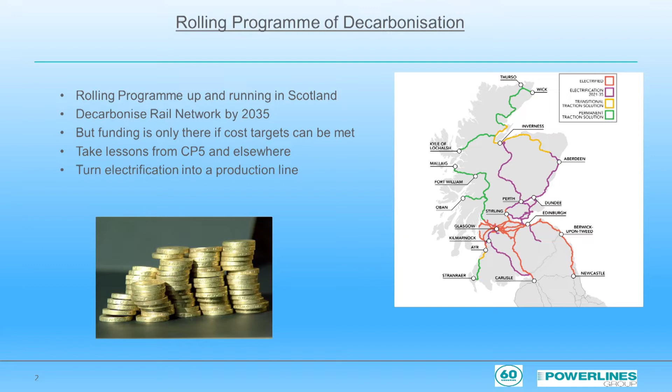From a delivery perspective though, we're not really where we could have been after 3 years of doing pretty much nothing on site up here. And all that training and knowledge of the previous 8 to 10 years has fallen away. But we are now very much underway in delivering the first schemes of this programme and trying to rebuild that skill base once again, and hopefully for the last time.

On Barrhead electrification, after a little bit of a false start last year, we're actually starting piling next weekend. On Haymarket to Dalmeny, we'll see the first piles going in the ground at the end of June, beginning of July. On the Fife corner, in the northern part of Fife, we've just submitted yesterday the Form A. And in Borders, which is actually probably the most advanced from a design perspective, we pretty much have an AFC design sitting on the shelf ready to go.

And then we've got the poor cousin, the traction power guys, where we're trying to upgrade the existing network and make it ready for the new electrified routes. The first new feeder station at Ferguslie, west of Glasgow, is due for commissioning in the coming months. Now, I know nothing of these giant fuse boxes, so if anybody wants to find out anything about them, Stephen Lynch or Brian Sweeney are standing over there. And it's also great to see lessons being learned from previous projects.

We're actually underway with CP7 design works to Aberdeen and Inverness, which would hopefully mean that once these CP6 schemes are finished, we're hitting the ground running.

But we're all too aware that funding for this rolling programme is only available if we meet the not inconsiderable cost challenge to get the STK rate down to where Transport Scotland need it to be. And from what I can tell, there isn't really much of a choice — we have to get it down to that rate, or we'll find something else to do. We've already made significant gains in getting that STK rate down, which is evidenced by the fact that we're actually starting construction works.

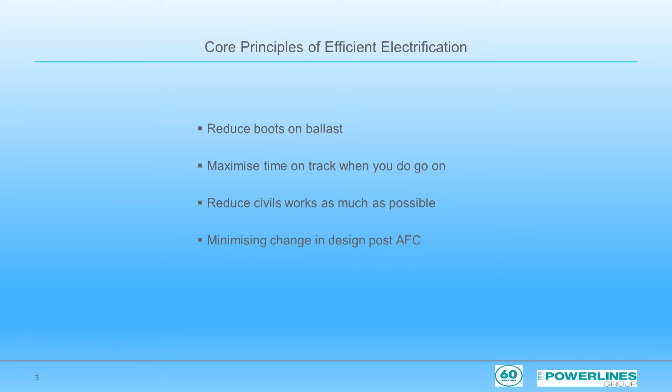And minimise abortive works and design change post-AFC. We won't eliminate it, but we need to be in a position where we are sure that the design will work when we turn up on track with all the materials and manpower.

There are loads of little initiatives we've been looking at, but there are a few key technologies and methodologies that we'll run through today that are really making a difference to us to help meet these 4 principles and drive down cost.

The first, and it's already been mentioned so far today, is the digital twin. I'm sure a few of you have heard it and used it. The driving force behind this in Scotland is Colin McAteer of Network Rail, and it's been successfully deployed in Borders and in the northern part of Fife, alongside the design partners Mott MacDonald, who have really embraced this.

Essentially, we've got a 3D mesh taken from drone footage that can have any design model referenced into it. And the big key for me is we can access it online. We do not need any fancy CAD skills to work it, which is good for us delivery guys. As you can see, it's almost video-like quality, a bit like a cab ride on steroids, and gives both construction and design a clear picture of what the finished design will look like and identify the constraints around it.

And bonus points for anybody that can identify that stadium. It's a bit niche to the Scottish market, to be honest. No. Raith Rovers, Starks Park.

So what are the benefits? Well, from a construction point of view, constructability reviews can be undertaken from the safety and comfort of your own home. Miles of track can be covered in hours rather than days and days spent out on track, or nights and nights. We've also used it for design reviews, IDCs, IDRs, hazards, signal sighting, even listed building consents, and identifying environmental and social constraints. It's actually harder to find something that it's not useful for.

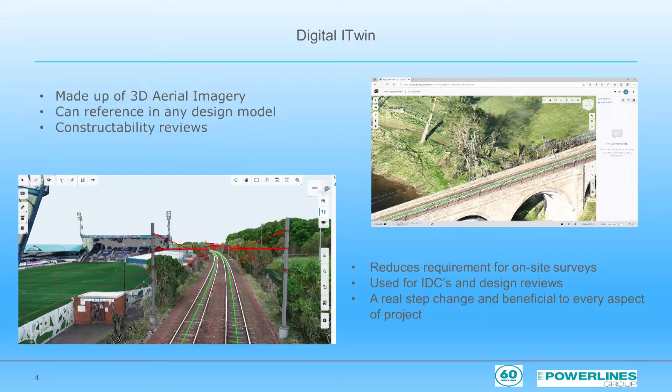Another technology we're looking at deploying is GPR, which we're using to reduce the volume of trial holes prior to piling and to reduce the overall length of the piles. Trial holes, for those that don't actually know, is essentially a 1-metre deep hole that we dig by hand to search for services. Then we fill it back in and then stick a foundation in it. It's time-consuming, expensive, and actually adds additional length to the pile by increasing the non-effective depth. And from a health and safety perspective, it's also a little archaic.

Sending humans down a hole to find cables is like sending canaries down the coal mine.

Network Rail Scotland looked at GPR as a way to reduce that pile length and carried out trials with GeoInfo, a specialist surveyor, over a number of sites to understand the accuracy and the outputs, and those were very positive. After initial reluctance on my part specifically, we've been very much bought into this and have started a much larger scale trial on Barrhead and Haymarket to Dalmeny, where over 450 locations have been surveyed to date.

We're currently carrying out a 20% check on those to build up our confidence in the technology, but the aim is to reduce that 20% down as confidence grows.

Alongside the reduction of pile length, in some cases that can be up to 25%, which in Scotland means we're actually less likely to hit rock.

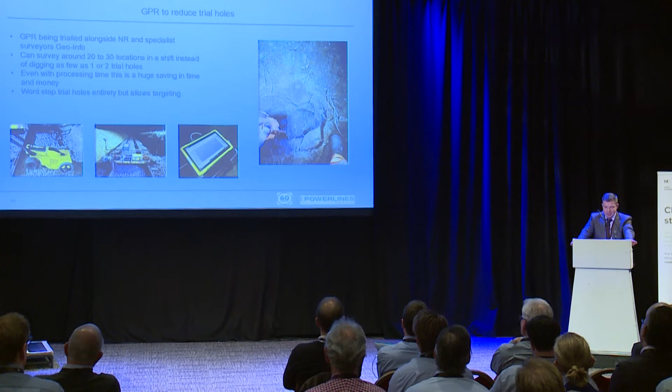The biggest benefit is that 20 to 30 locations can be surveyed in a single night, rather than 1 or 2 trial holes being dug. And even when you factor in the processing time, which is about a week, this is a massive reduction in programme and time spent on track.

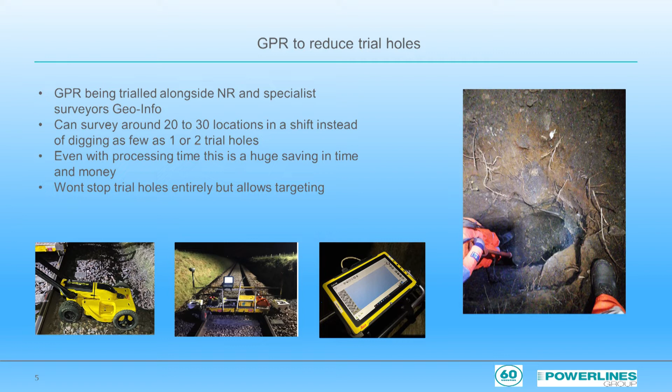This won't stop trial holes entirely, but it allows areas to be targeted, like stations and junctions where we've got complex areas, and areas where we do find services but can't move the foundation out of the way.

But there are some slightly wider benefits to using this, due to the output from the GPR being in CAD, and essentially becoming an accurate, up-to-date, buried services model.

And if the survey is done in a timely manner, then this becomes an input to the design, rather than services becoming something we react to post-AFC.

On Haymarket to Dalmeny, we've actually managed to supply this to Atkins, our designer, prior to the IDC for the Form B, which has allowed the design to be updated and gives us the surety of foundation installation, or certainly more sure, which will reduce on-site change.

But the real goal, though, for me, is to do this survey as part of the Form A. And this is really possible due to the accuracy of things like the automated design tools and iTwin, which allows us to go on site with confidence at that stage.

Moving away from the technology part, we're working hard to reduce the civil requirements in projects. A wise man who's now moved to Saudi Arabia once told me that the more you involve civil engineers in overhead line projects, the more expensive it gets.

The recent EPTANs and voltage control clearances and parapet heights have already brought significant savings, but we are now more looking at the overhead line foundations, both what they are and where they are.

Piling is still the go-to for efficient installation, and with the reduced pile depths we are now getting through a reduction in non-effective depths and the use of actual loads instead of 75% yield strengths, this will only improve.

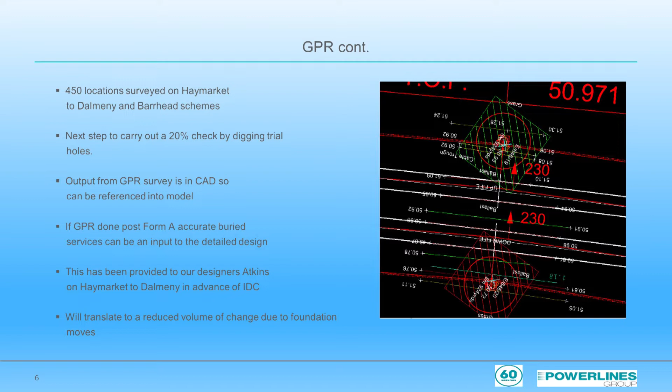Rock is probably the biggest cause of bespoke foundations in Scotland, and it's a thing we've got a rather lot of. I've used many solutions over the years to deal with rock, but it's always felt that we never quite got it right, mainly because we were never quite sure where it actually was.

So we decided to try out all the various methods we've used in the past and see what was actually best. Our lead civil engineer, Mark Craig, arranged a few days at Cloburn Quarry, along with our piling contractor, Story, and our borders designer, Motts.

Cloburn, for all you PWI types, is where you get most of your ballast from in Scotland, and is a red granite quarry, which would provide a significant test for the trials.

So they tried out techniques like down-the-hole hammer, micro-piling, coring and augering to understand output, limitations, set-up times, even measuring noise, all done off-track in a contained and safe environment.

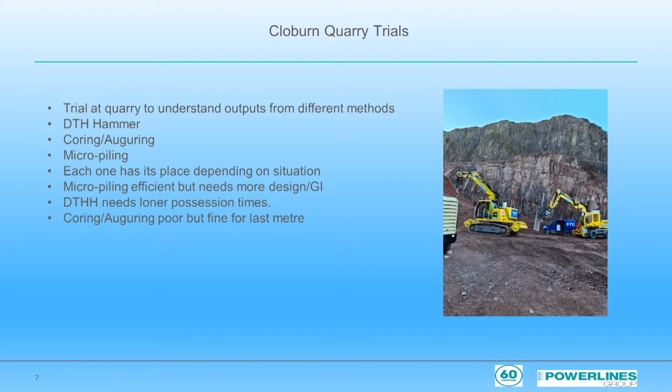And the outputs were, with the exception of the coring, which was hopeless, they all have a place in our armoury, but it depends on the situation you're faced with and the access that you have.

Micropiles were superb, went through the rock in no time at all, but they do require a bit more design time to pull it together. And there's still the issue of transferring from the micropiles to the mast, which we are actively working on. The down-the-hole hammer was brilliant as well, but it's incredibly noisy and takes a long time for setup costs. But it still has its place.

It causes disruptive possessions and disruptive access, but once you're on track and you've got yourself going, it's a very good output, and you end up with a pile at the top. Augering still has its place too, where if we identify rock that's only the last metre or so, you might as well spend the time doing that rather than bringing in an expensive down-the-hole hammer.

But the key to knowing what to use and when is knowing where the rock actually is. We spend millions on GI to inform design, but for me, the most essential part is knowing the actual depth of rock at each location. Spending the time and money doing that is worth it, as it gives us surety of the foundation installation.

We've just completed a few nights at the weekend of probing in Barrhead, and we decided to use a 6-inch mast and a Movax, which we drove down to find the rock level. Now we know exactly where, over 50 locations where we knew there was shallow rock, that rock level is. This was done over 2 or 3 nights, so it's very inexpensive - certainly worth it. We can now plan the installation of each of those foundations with a degree of confidence.

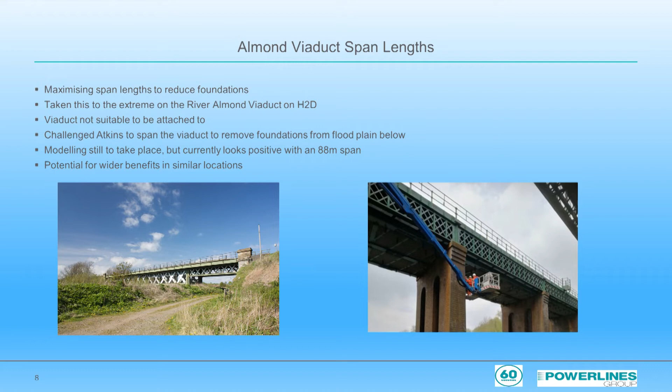But should the modelling prove favourable, there's potential not only to reduce the expensive viaduct attachments we install, but also to really push the boundaries of the 65-67 metre span length limit in UKMS to a much higher value, significantly reducing the overall foundations we need to install. And if we're able to do that using existing equipment within the range, then it's good for everybody.

I suppose I should really talk about overhead line construction as well. Our entire construction strategy is around minimising the works done on track by doing as much off-track work as possible. Off-track works are safer, cheaper, and much more efficient.

This essentially means we're going to attach everything onto the masts in the yard prior to taking it out on site - SPS, number plates, DP stocks, earthwire connections, bonds, everything we can possibly get on the mast will be going on before we take it out on track. We're also going to pre-rig the cantilevers in the yard and take them to site, attach them to the mast on the ground, and lift it in one go. This approach will reduce the normal 3 or 4 visits to each mast, hopefully down to a single visit.

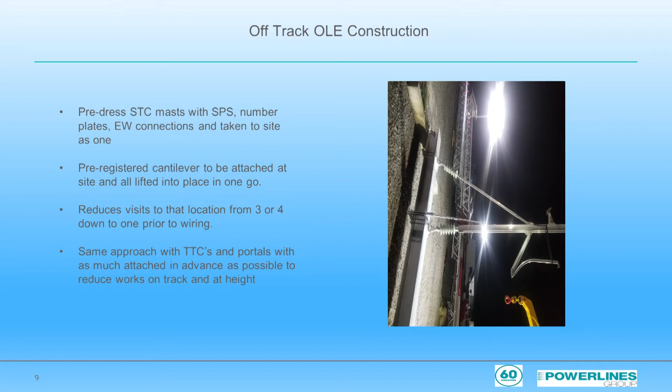It also removes the working at height requirement by taking MUPs out of the equation altogether, as this can be done with an RRV and a couple of trailers. This approach will be hugely beneficial in Scotland, where STCs make up the majority of structures, but we're also looking to apply this principle with portals and TTCs. We've even started seeing if we can attach switches onto the top of portals and masts as well and take them to site. But it's all about logistics and prep.

But there are a few things needed to make this approach work. Design maturity to allow the ordering of materials and number plates, which become very expensive if you go out with a MUP to go and install them. Get all these things in advance. Accurate survey data and as-built information from the foundation is an absolute must, to ensure that we attach all the equipment at the correct height.

One of the biggest things for us is patience. We've all been in projects where everyone was jumping up and down trying to get you on site just to see progress, as Colin Finlay would have called it, the 'Are we there yet, Daddy Brigade?' But this approach needs all the materials available and all the designs up to date before lifting a finger. No longer do we run out and install a foot, a mast, or two just because they're in the yard.

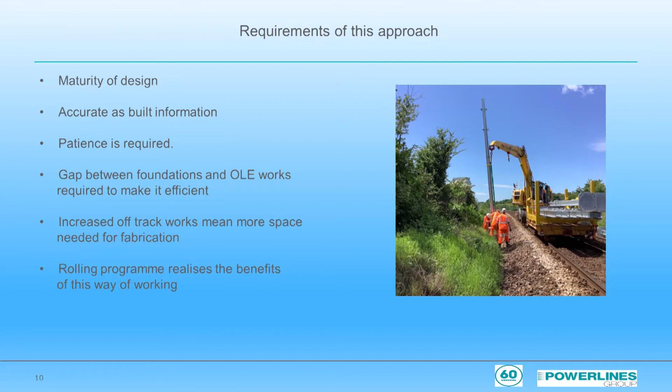We also need pretty much all the foundations in a given area finished before we start. On the Shotts Electrification in CP5, the overhead line team waited until there were over 600 foundations installed before they installed a single mast. But within 6 weeks, they'd caught them up, and then they were stood down, which is obviously very expensive. But with this approach, with only a single visit to most locations, we'll close that gap even quicker. So patience and timing is everything.

A rolling programme will really benefit from this methodology, as the foundation teams and then the overhead line teams will just roll from one site to the other. Once the overhead line team's on, the foundations should be installed further on.

To be honest, we've not actually managed it in anger particularly yet, because none of the designs have been in a place where we want to do it. On Barrhead, we managed to get the SPS up, but we haven't had the cantilevers. So I'm sure we'll come across some issues and have to tweak our outputs and methods. But starting Barrhead in the next couple of months, this is very much the way we're going to be doing it.

With the use of all these technologies and methods, amongst other things, we are very much on the way to meeting that STK rate aspired to, and we will continue to work to make improvements. But it's very much dependent on there being a rolling programme. We cannot put all this work in for this control period and then spend 3 years with no site works again, as we have done this time, as we'll just lose all that experience and knowledge again.

But there are a few big items that can still be done to make electrification more efficient in Scotland: funding and volume of works. Contracting small 20, 30 kilometre sections, or even worse, releasing a scheme piecemeal, where we design a bit, build a bit, design a bit, build a bit in that continual cycle, is actually the worst of it all. We need to get to the place where large volumes of work are contracted in a single event, both design and build, to prevent all the stopping and starting and let us make use of all the tools that we've got.

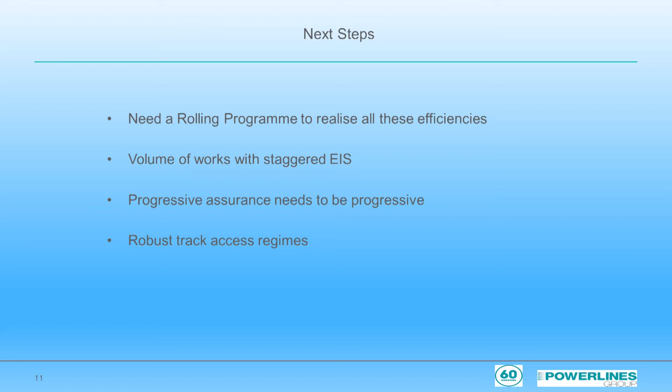Progressive assurance is another area we need to work on, an expression everyone uses but nobody seems to know how to make it work. In design, with all the automated softwares and technologies we're deploying, like the iTwin, we're trying to take the Network Rail project engineers on a journey with us, keeping them involved and sighted of everything that's happening, but yet we still have a 4-week review period from Network Rail for every single design submission. I'm aware this isn't probably the case elsewhere, but it's still very much where we are. And there's a lot of work putting into it, but 4 weeks is longer than a lot of the designs actually take to produce. Similarly, in construction assurance, we've created an entire new industry for assurance, with armies of people employed to do what used to be done by a few people.

Sorry, keep my notes.

There are lots of software packages that have been created to help with this, and they are genuinely superb. We're using Synchro in Scotland, I know EV-File and others are used elsewhere. And what they can do is really, really good.

But we have to think about what we are asking to be recorded on site, to prevent supervisors needing secretaries with them to complete all their online forms for everything they do and touch. I'm not saying we do away with this aspect at all, more that we really need to discuss what needs to be recorded and by whom.

The terrible events at Carmont should really shine a light on what needs to be recorded and why. And for me, it's change - change to design, change to materials, change to on-site conditions - not endlessly recording torques of every bolt installed and where we put the snap head pins.

And the last part, and possibly the biggest area for potential efficiencies, is possession access. Standard rules of the route, which is what we're delivering Barrhead on at the moment, has to be discounted for all new electrification projects in the future if we're going to have half a chance of achieving these required rates.

4-hour possessions with an actual productive time of 2 hours each night is just not sustainable. But on the flip side, blockades are also not the answer, as they come with their own enormous logistics and resource issues. And at the end of the day, the railway is there for the passengers, so we cannot close the railway continually for long periods without severely denting passenger numbers in the long term.